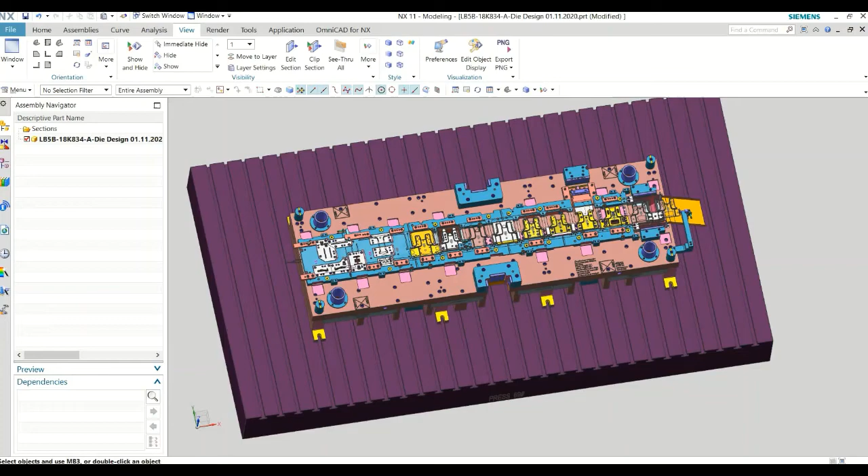Okay, now let's see the upper die, and for that I'll hide all these.

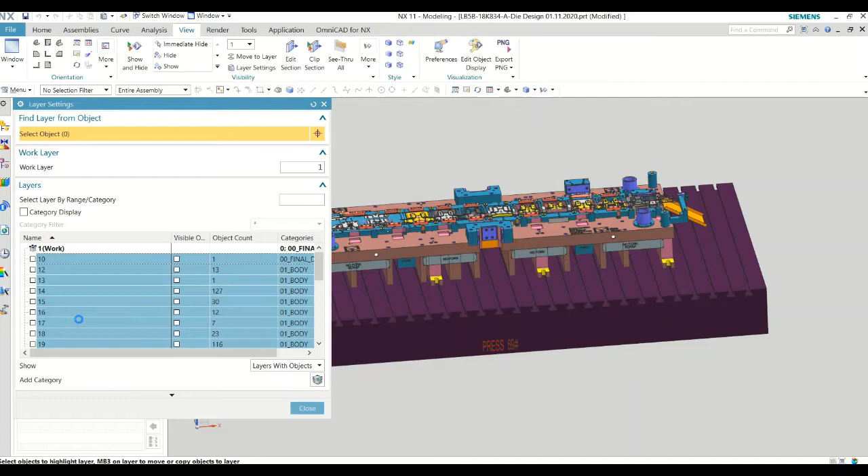Here is the upper die, and this is the slide. Let me hide it. Okay, and as you can see, let me just quickly take you through the upper die.

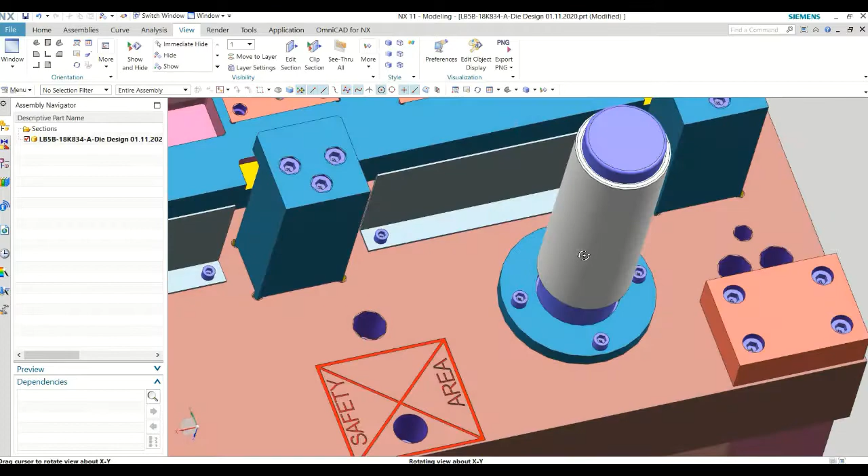So as you see, we have these four guide pins, and the guide pins have ball bearings. So these are bearings for easy and fast movement.

And then we have, here, a stripper plate. It's an upper stripper plate, right? We have at four places a hardened plate to work against the stop block.

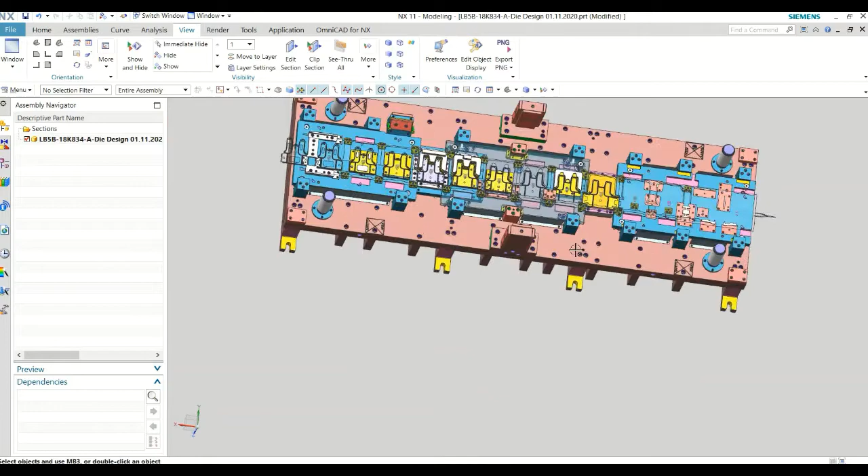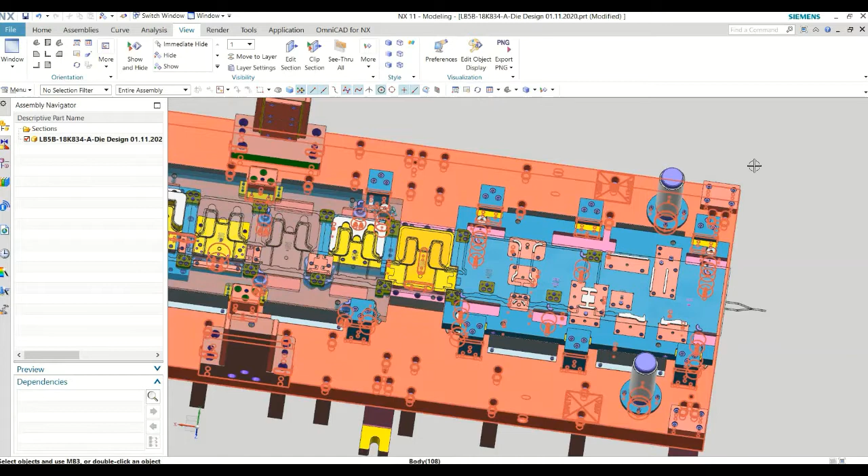We have a safety area written over here, so if we have to do any work in the die when it is in the press, we keep aluminum safety blocks, or whatever safety blocks are given or provided in the press, so it won't crush you down when you have your hand or anything inside the die, right?

And these are your main heel blocks. So you see we have wear plates bolted to the heel block, right?

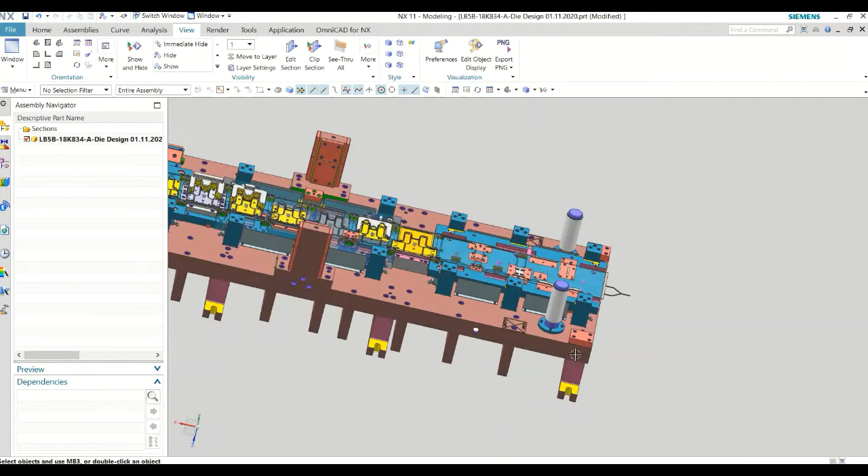Now we start from here. Of course this is the top plate, and then you have upper parallels, clamping parallels, normal parallels, right?

One thing which you didn't notice, to handle it we have handling holes in the upper and lower. We don't have any handling hook or pin.

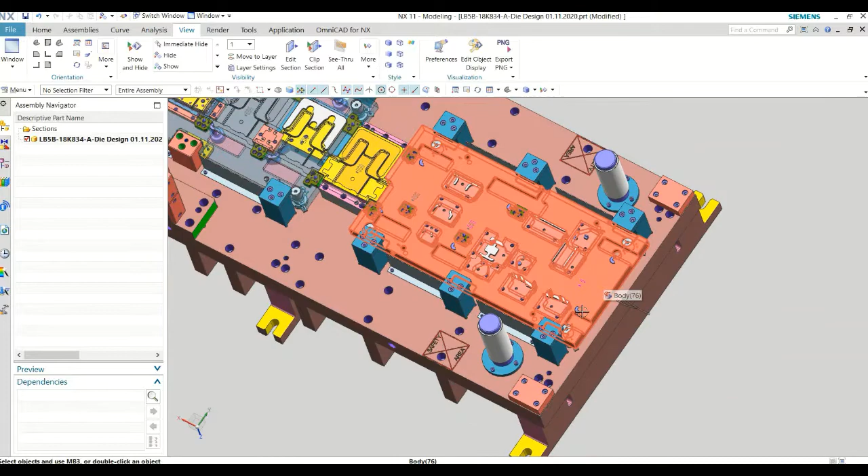Okay, now this is my upper stripper plate. These are the guard. Okay, so as you see the upper

plate, these are getting guided using these four guide pins. Four guide pins are assembled to the stripper plate, and guide bushings are assembled to the top plate.

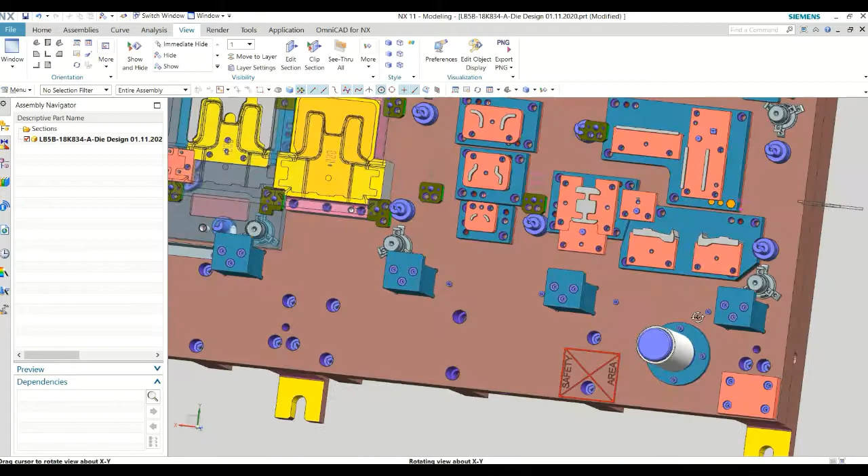These are for guiding, and for retaining we have, as you can see, retaining blocks. So we have 6 retaining blocks here, two-piece construction. So this is the one which is bolted to the upper plate, and this one is bolted to this block, and this is hardened.

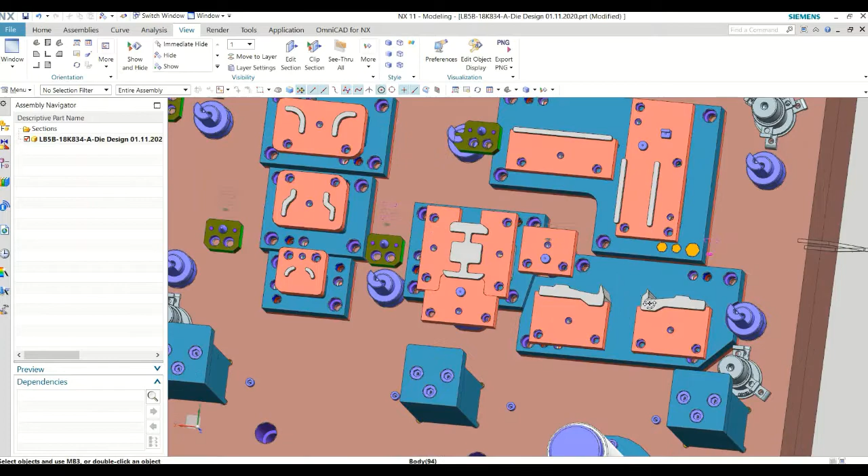Now let me hide this. Okay, now one more thing which you can see here, around the punches, right?

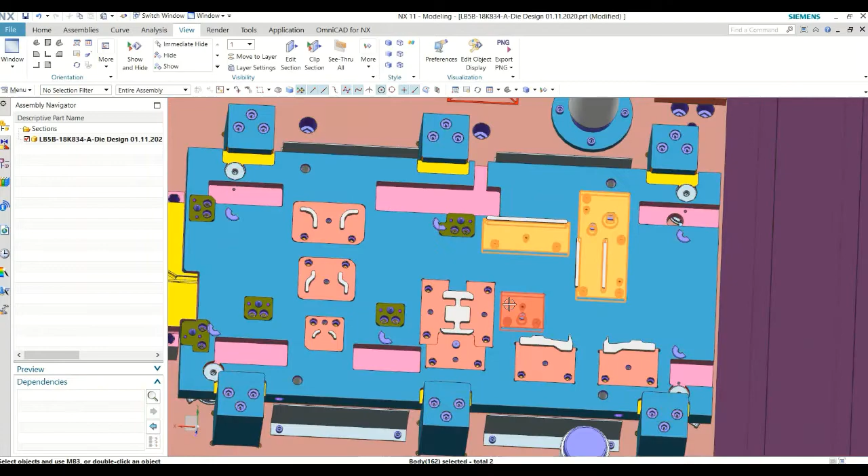So around the punches we had a lifter, a stripper window plate. So we have a stripper window plate here, here, here, all around the punches, right? So these